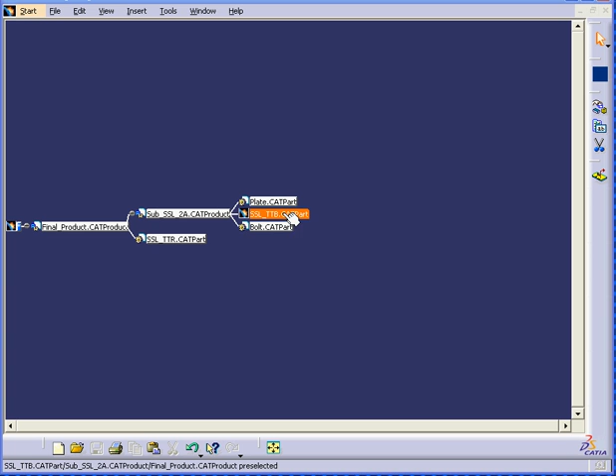We seem to be missing a part. Let's click the desk to go find it. Right-click on this part which appears to be missing. Select Find. And here's our part. Open it. Now let's close the desk. And here we have our components.

Next, we're going to use the compass to position the components.

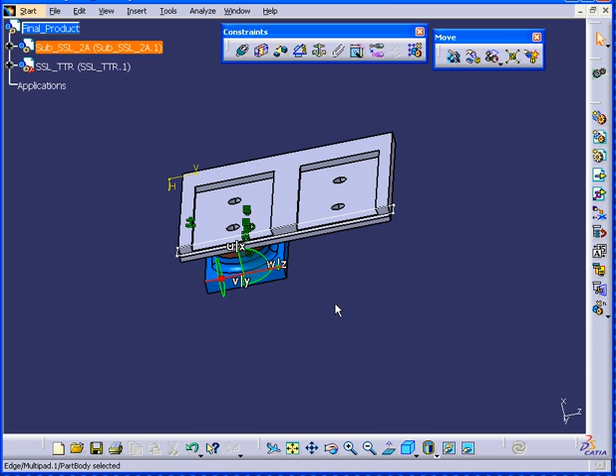Now we need two of these components for this assembly. Let's right-click and copy. Right-click and paste at the assembly level. You'll notice that when I copy, I click at the component level, but when I paste, it's at the assembly level.

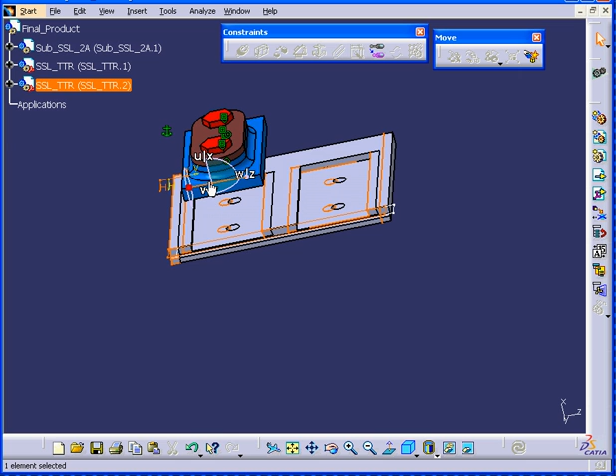Now on the component I just highlighted, let's move it. Oops, it's actually not highlighted. Okay, I see what's happened. I've copied the wrong component. All right, let's fix this.

Right-click. Let's go back to the assembly level and delete the component. Now let's go get the right one. Right-click, copy, and back to the assembly level where we paste it. Okay, now we've got the right component, and once it's selected, we can move it.

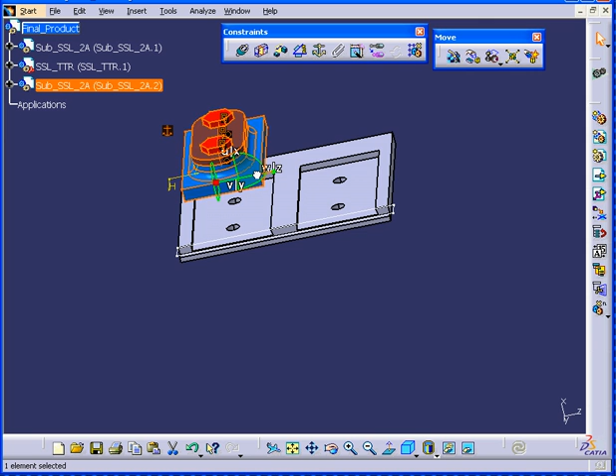Now let's rearrange our tree. Move it down, apply, click OK.

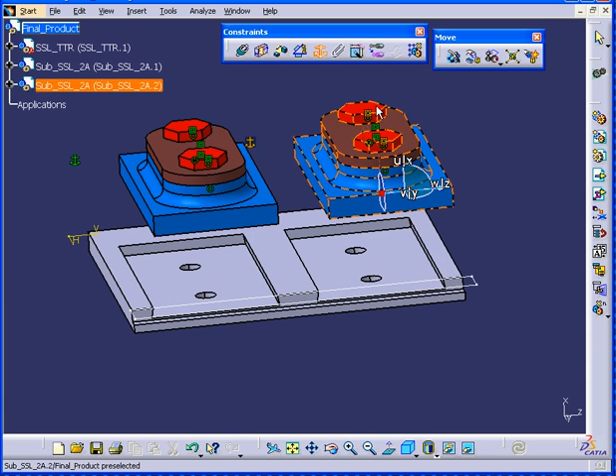Now let's use Fix Component and fix this component. We do need to hide these bolts.

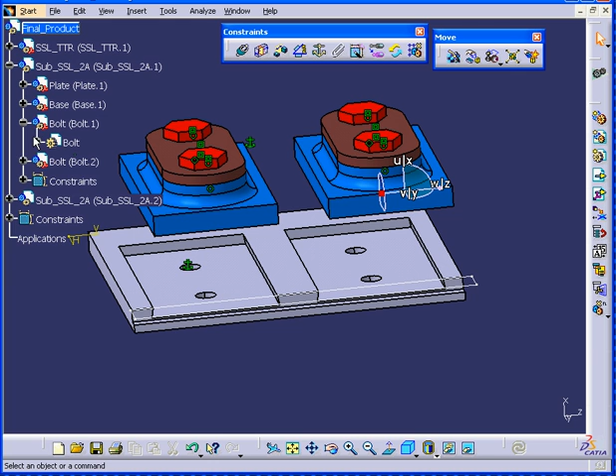So let's right-click after we expand the specification tree. Selecting Hide Show, one bolt is moved to No Show. But we do need all four to disappear, so let's bring this back. And let's go deeper to the part body level. Right-click, Hide Show, and now as you can see, all four bolts are hidden.

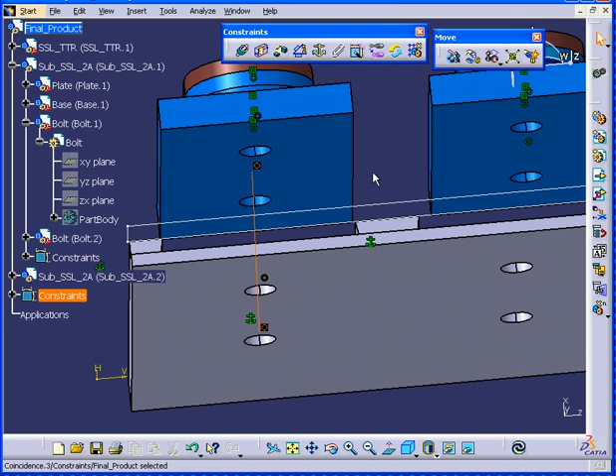All right, we're going to constrain our component now. First is the coincidence constraint, to constrain this hole to this hole. Second, this hole to this hole. Third, this hole to this hole. And lastly, this hole to this hole.

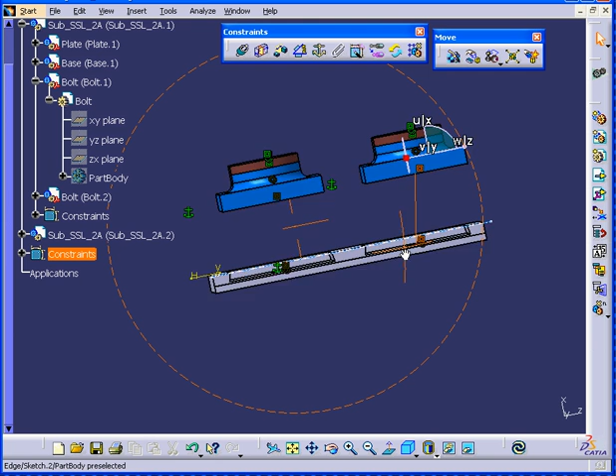Next, we will apply the contact constraint, this face to this face, and this face to this face. Let's hit Update. As you can see, our components are constrained.

All right, let's bring the bolts back. Right-click, toggle back to Show.

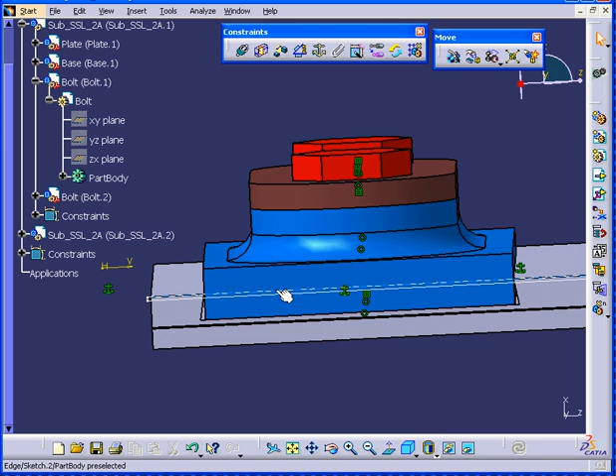We seem to have a problem here. It looks like this part doesn't match the base exactly. Well, let's replace this component.

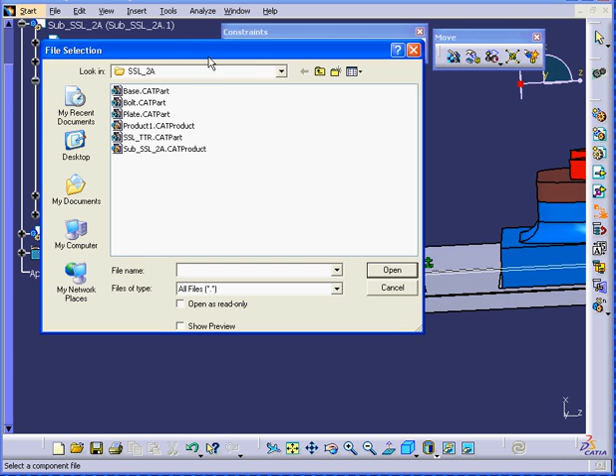I can use the Replace Component function from the Product Structure toolbar. Or I can right-click on the component, select Components, select Replace Components. Now we navigate to find the right component and we open it.

CATIA prompts us, asking us if we want to replace all instances of the selected element. We will choose Yes and click OK. Now, as you can see, it fits perfectly with the base.

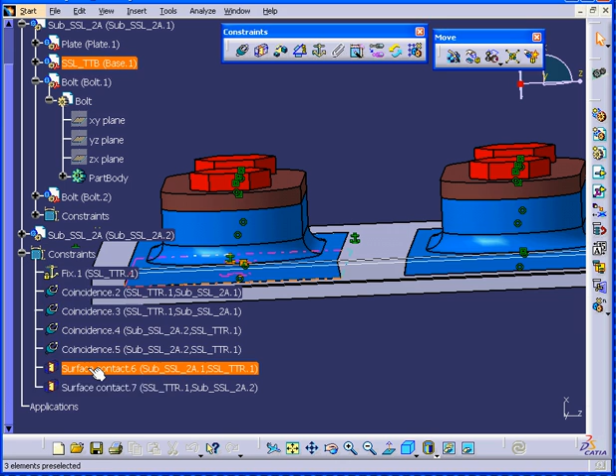Sometimes when you replace components, some constraints will get broken. If that happens, you will see a yellow exclamation mark in the specification tree next to the component. When this happens, you have two choices. You can delete the constraint and create another, or you can double-click on the constraint and select More. Right here, you will see the word Disconnected. You'll need to click to reconnect and then click OK.

Next, let's collapse and expand the plate component. You'll see I'm in the Part Design workbench. I double-click on the plate at the part level.

All right, let's add some chamfer to this part. Click on the edge, enter a value of 1/8 of an inch, hit Tab, and preview. When I click OK, you will see that the changes will be applied to this plate as well.

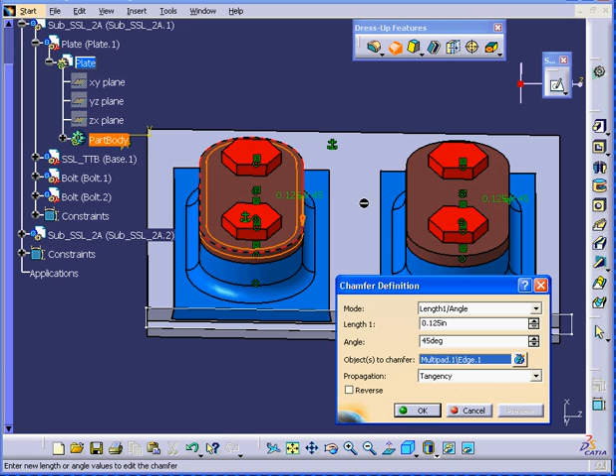As you can see, basically you can make adjustments at the part level anytime. After making your adjustments, you may go back to the assembly level and keep assembling your components. And this concludes our third tutorial on assembly.